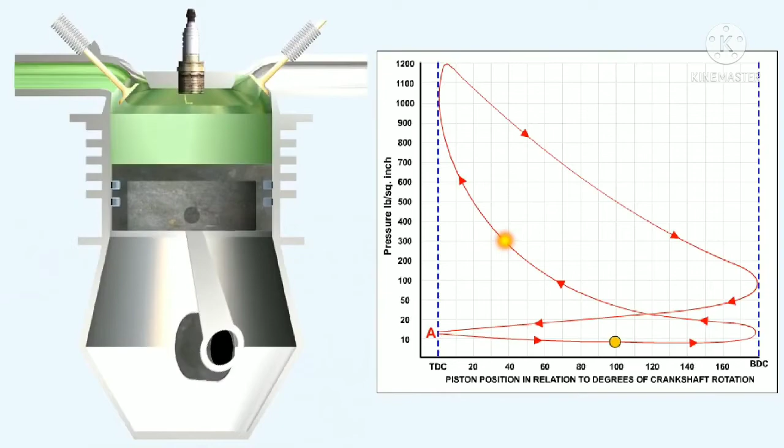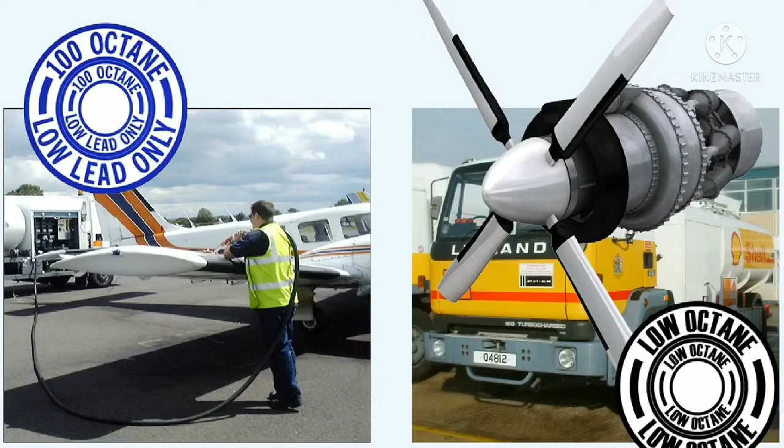These high internal pressures necessitate utilizing extremely strong and heavy construction in the piston engine, and also, if detonation is to be avoided, the use of high-octane fuels. In contrast, in the gas turbine engine, the use of low-octane fuels and relatively light construction methods are the rule, rather than the exception.

The turbojet is a heat engine. The higher the temperature attained in combustion, the greater the expansion of the gases, and hence the greater efficiency of the engine. There is, however, a limit to the amount of heat that can be released into the turbine from combustion.

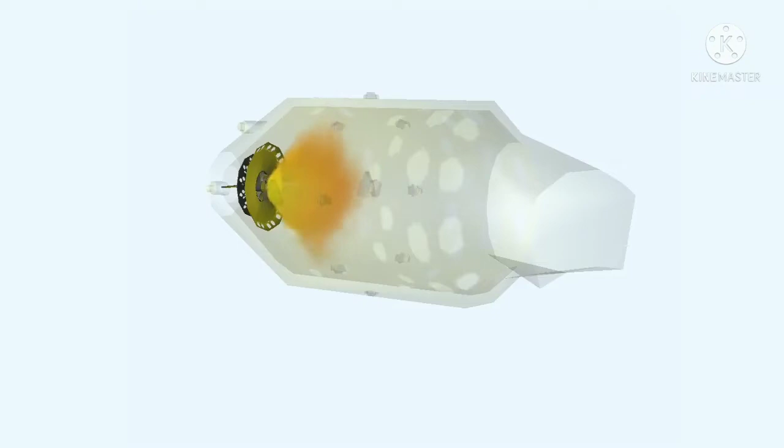This limit is imposed by the materials from which we manufacture the nozzle guide vanes and the turbine blades. The Germans' inability to produce materials which could withstand the heat of the gas stream was the main problem with the early German gas turbine engines.

Because of the poor materials used in the turbine assemblies, the engines would only run for between 10 to 20 hours before the turbine blades suffered meltdown and engine disintegration commenced, usually in a quite catastrophic fashion.

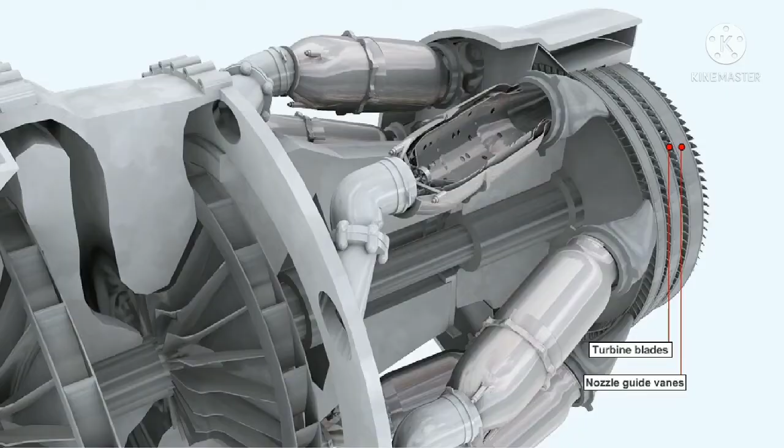The use of modern materials and extremely efficient cooling methods in the nozzle guide vanes and the turbine blades has enabled the use of much higher gas temperatures in the latest engines. This has resulted in the more modern engines having a higher thermal efficiency than their predecessors.

Gases behave differently from the other two commonly studied states of matter, solids and liquids, so we have different methods for treating gases and understanding how they behave under certain conditions.

Gases, unlike solids and liquids, have neither fixed volume nor shape. They are moulded entirely by the container in which they are held.

There are three variables by which we can measure gases: volume, pressure, and temperature.

We'll discuss two of the so-called gas laws which are most pertinent to the operation of the gas turbine engine: Boyle's law and Charles' law.

Robert Boyle was born in 1627 in Ireland. He made important contributions to physics and chemistry, but is best known for the law which was named after him, concerning an ideal gas.

Boyle's law states that, in a gas which is held at a constant temperature, the volume of that gas is inversely proportional to its pressure, or pressure times the volume equals a constant. This holds true where P is the absolute pressure of the gas, and V is the volume occupied when the pressure is P.

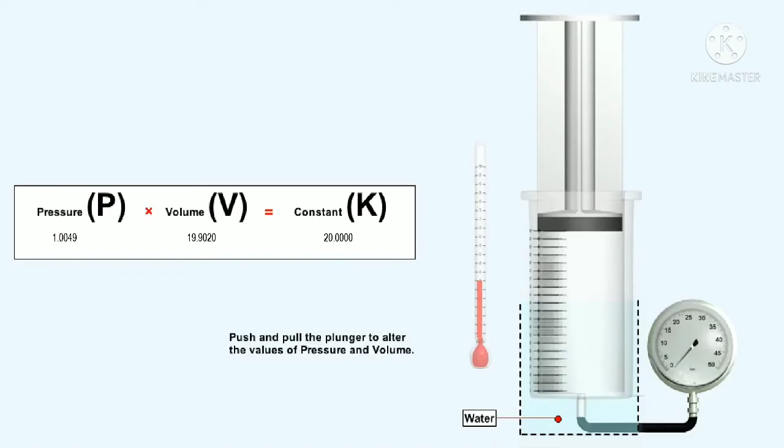Because of the interest in hot air balloons in the early 1800s in France, Jacques Charles and Joseph-Louis Gay-Lussac made detailed measurements on how the volume of a gas was affected by its temperature.

Just as Robert Boyle made efforts to keep all properties of the gas constant, except for the pressure and volume, so Jacques Charles took care to keep all properties of the gas constant, except for its temperature and volume.

Charles' law, or Gay-Lussac's law, states that if any gas is held at a constant pressure, its volume is directly proportional to the absolute temperature, or, if stated as a formula, the volume divided by the temperature is a constant.

Just as we did to demonstrate Boyle's law, we'll replicate an experiment similar to one carried out by Jacques Charles. If we partially fill a calibrated syringe with air and place it in a container of water, then by increasing or decreasing the temperature of the water, and thus increasing or decreasing the temperature of the air inside the syringe, while taking readings of the volume and temperature, and then dividing volume by temperature in degrees Kelvin, we see that the answer is a constant.

Remember that, in theory, the pressure inside the syringe remains constant also. Try changing the temperature of the water for yourself, and notice that the results of the volume divided by the temperature remain a constant.

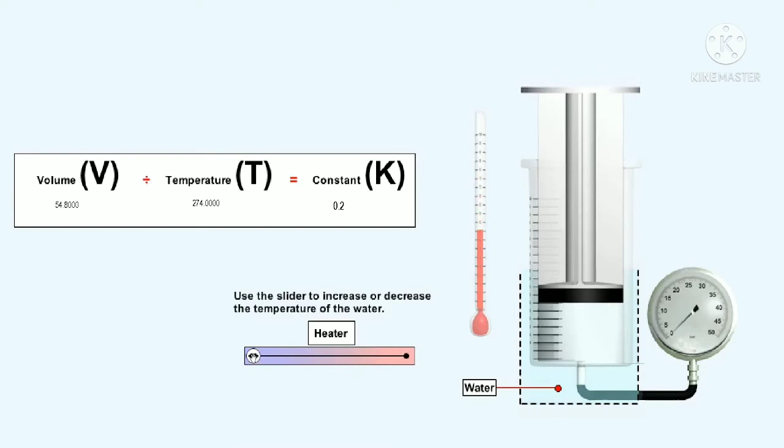Although both Boyle's law and Charles' law work in theory, we are unable, with existing technology, to make them work in practice. For instance, it's impossible as yet to increase the pressure of a gas without increasing its temperature, because of the adiabatic heating which inevitably occurs. Remember the example which is consistently quoted of how a bicycle pump always heats up when air is pumped into a tire.

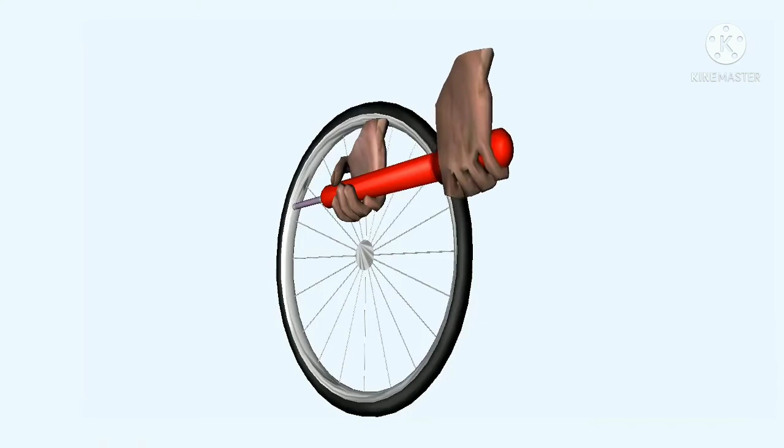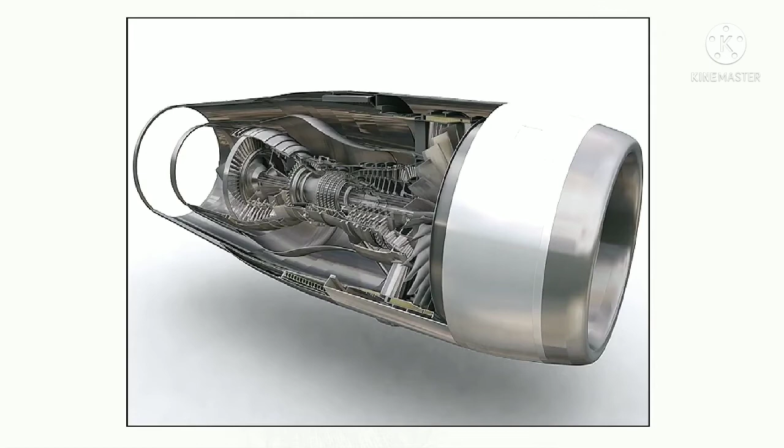By using Boyle's and Charles' law together, we get a practical method of determining what is happening to the gases inside the gas turbine engine, where temperatures, pressure, and volume are all changing constantly. With the scientists' usual lack of imagination, they have named the integrated Boyle's and Charles' law the combined gas law. The combined gas law represents the relationship between volume, pressure, and temperature. This may be shown as P1 times V1 over T1 equals P2 times V2 over T2.

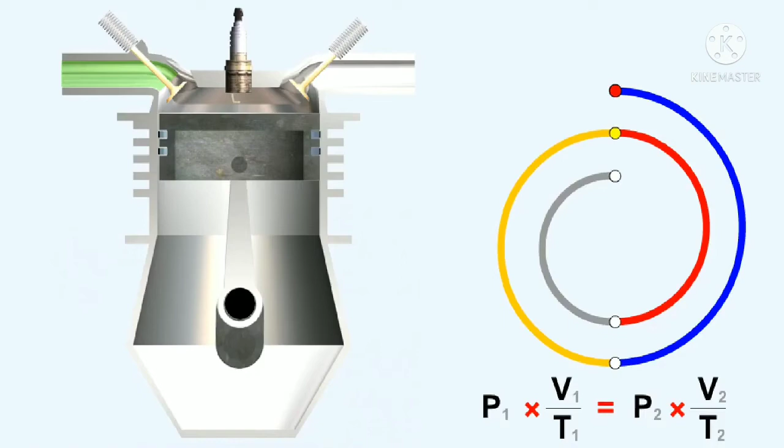The three main stages when these conditions change in the gas turbine engine are during compression, combustion, and expansion. During compression, work is done to increase the pressure and decrease the volume of the air. There is a corresponding rise in its temperature. Just as they do in the piston engine, higher compression ratios give higher thermal efficiency and lower specific fuel consumption.

Notice that the velocity of the air as it progresses through the compressor is actually reducing. This is required so that when it gets to the combustion chambers, its speed is not such that it will extinguish the flame.

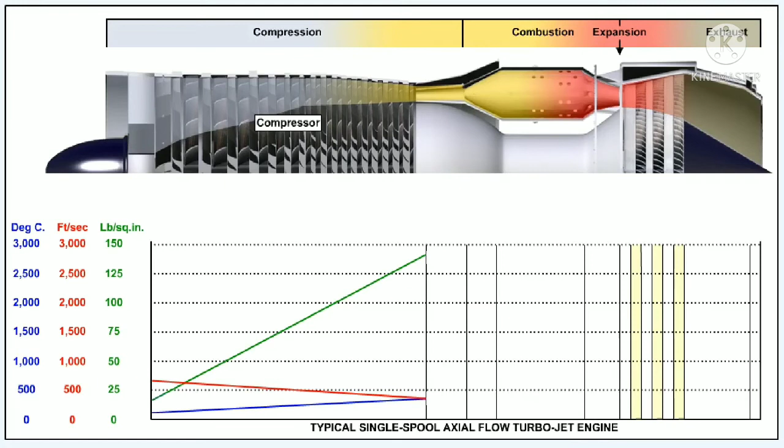During combustion, the addition of fuel to burn with the air increases the temperature, and there is a corresponding rise in its volume at an almost constant pressure. The velocity of the gas flow continues to reduce through the combustion phase, until the end of the combustion chamber, which, due to its convergent shape, initiates an increase in its value. The reason for this will soon become apparent.

During expansion, when some of the energy in the gas stream is being converted to mechanical energy by the turbine, there is a decrease in both the pressure and the temperature of the gas with a corresponding increase in its volume.

The changes in velocity over the expansion phase are a little more complicated than in the previous phases. The expansion phase is when the kinetic, pressure, and heat energy in the gas stream are being converted into mechanical energy by the turbine to drive the compressor.

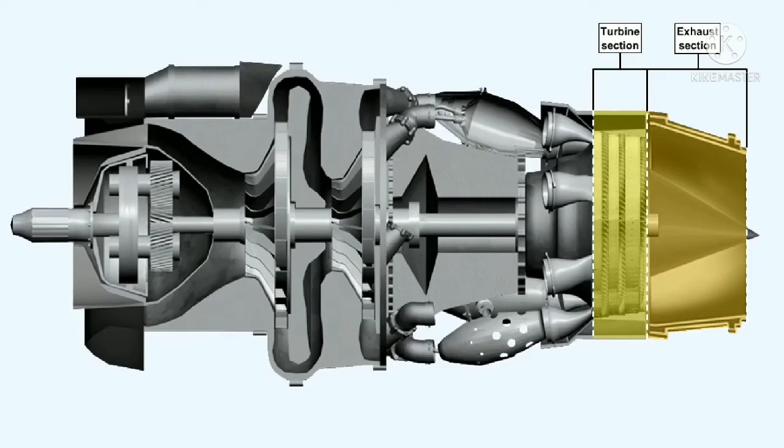The turbine is most efficient at converting the kinetic energy in the gas stream into mechanical energy, and in order to do this, the nozzle guide vanes which precede each turbine rotor stage are shaped to form convergent ducts. At the nozzle guide vane stage, the pressure energy, and to a lesser extent the heat energy, are reduced by the convergent ducts, and converted into kinetic energy, which, as you can see, shows a dramatic rise.

The turbine rotor following each nozzle guide vane stage reduces this kinetic energy by converting it, and some of the remaining pressure and heat energy, into mechanical energy. Succeeding nozzle guide vane stages will continue to convert the pressure and heat energy in the gas stream into kinetic energy, and the turbine rotor stages which follow them will convert that kinetic energy into mechanical energy.

The gas stream is then directed into the exhaust nozzle, where the velocity decreases at the expense of a small rise in pressure. This decrease in velocity assists in maintaining the losses in the jet pipe due to turbulence at a minimal level.

Finally, as the gas passes through the sharply convergent propelling nozzle, the duct shape causes a distinct increase of velocity, and the pressure of the stream drops to that of ambient in response to that increase.